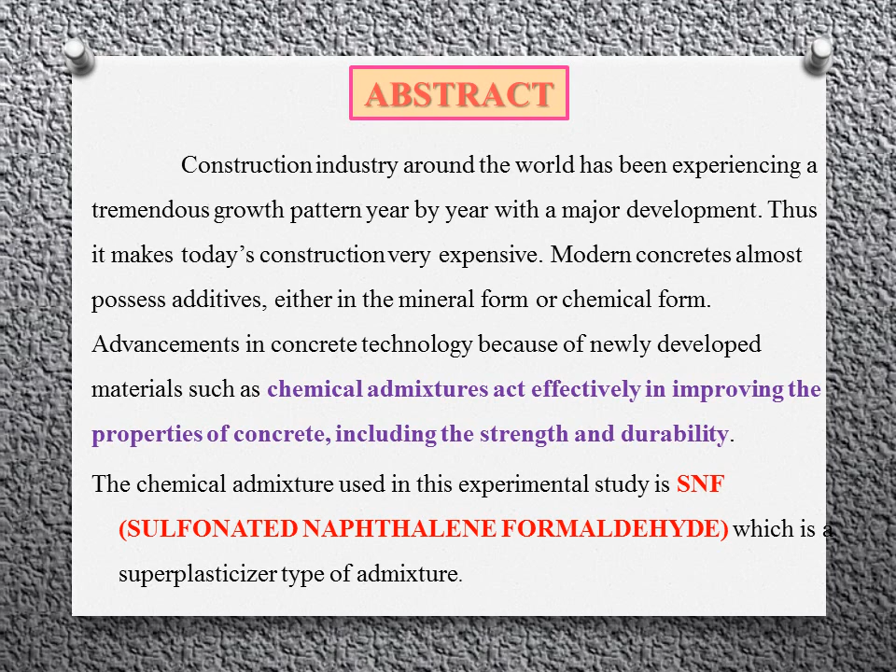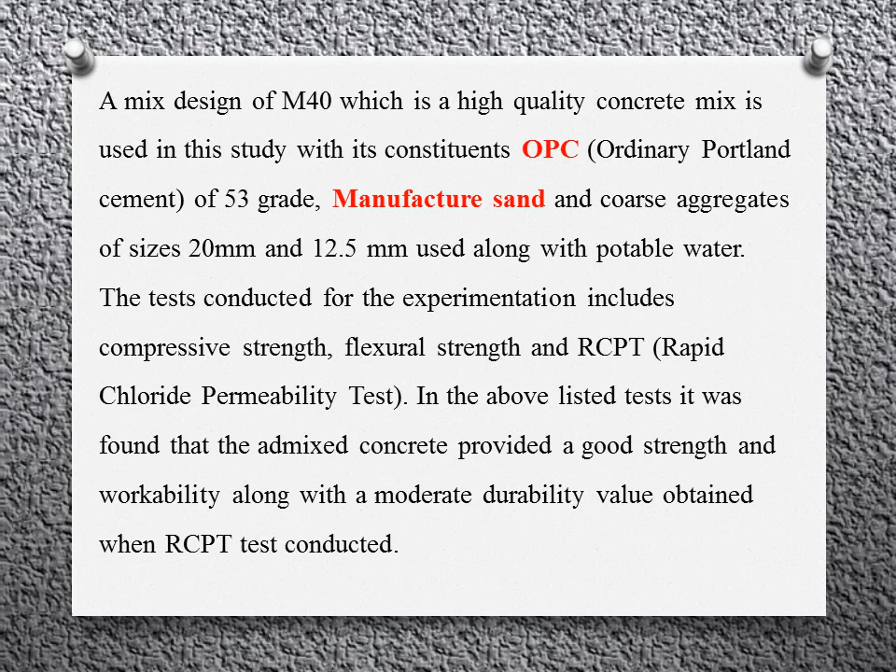M40 is the mix design in this study, along with OPC binder, manufactured sand and coarse aggregates of 20mm and 12.5mm. The strength test and the RCPT test were conducted.

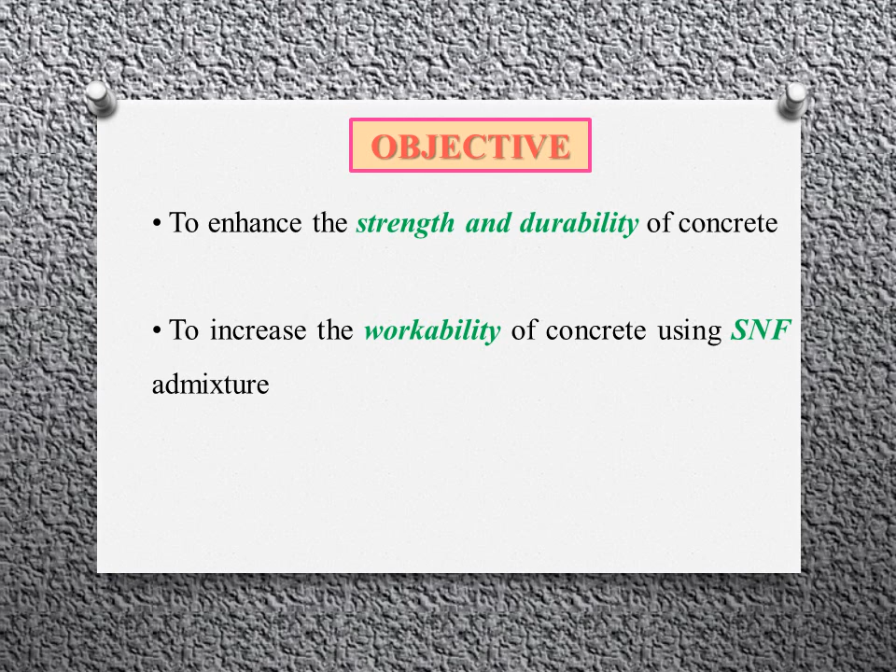The main objective of this study is to enhance the strength and durability of concrete, and also to enhance the workability of concrete.

The need for the study: admixtures of different types are commonly used nowadays to enhance various concrete properties. Thus, this study focuses on SNF, a superplasticizer type of chemical admixture, which is also a second generation type of admixture.

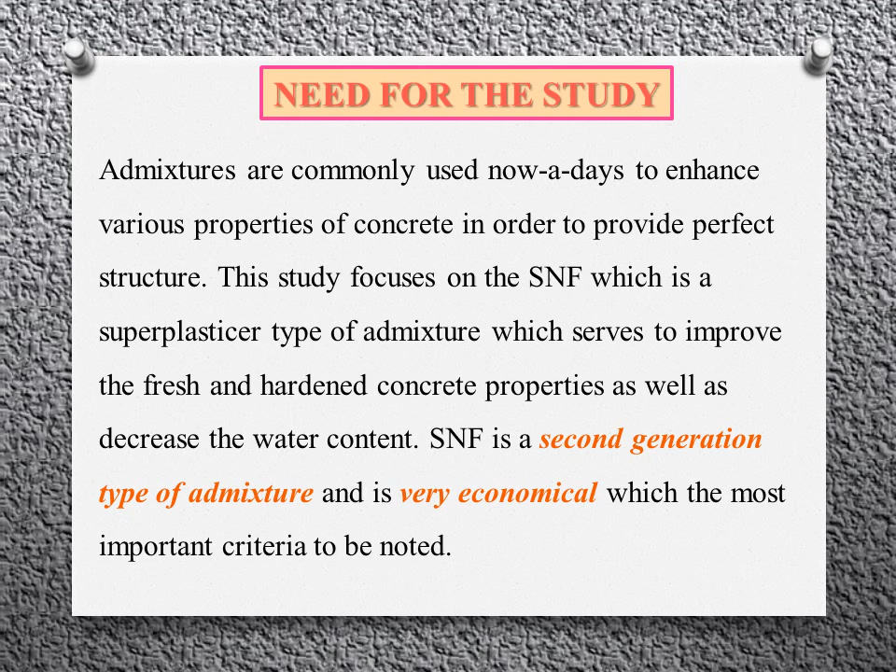It is very economical. This admixture serves to improve the fresh and hardened concrete properties.

SNF is highly pure and it makes the cement particles have high dispersency, low foaming, high range water reducing and obviously strengthening. It also improves cement workability and mobility.

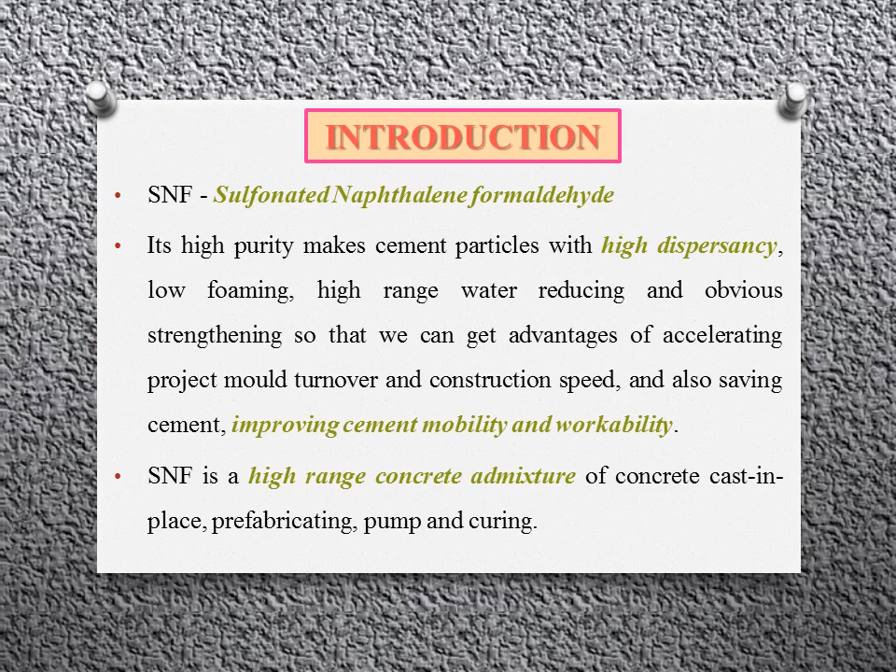The main advantages of SNF are it can adapt to various cements, as well as non-erodent and non-poisonous. It can be applied to highways, hydroelectric projects, ports, quays and skyscrapers, etc.

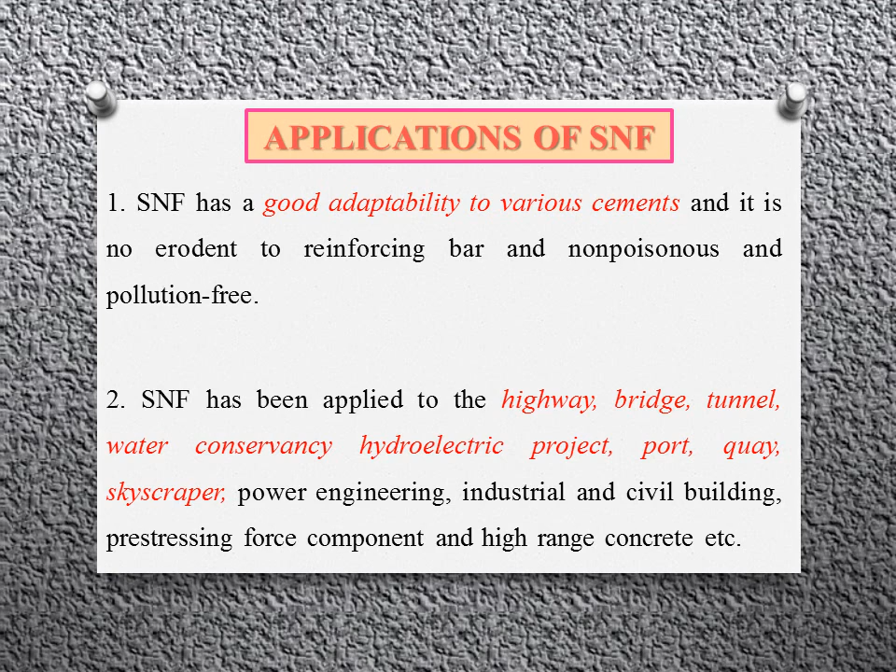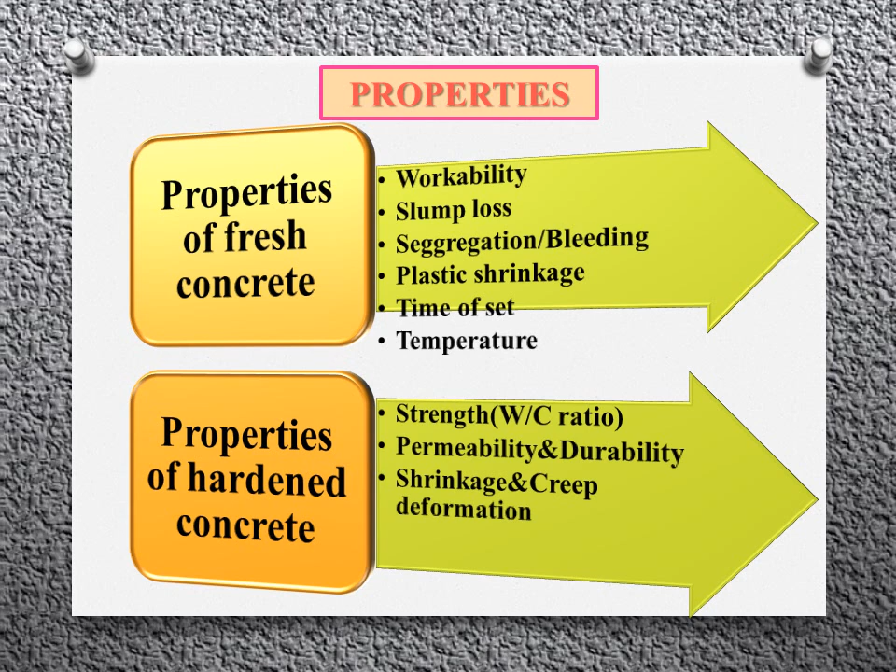The properties of the fresh and hardened concrete are as shown. Admixtures: types of admixture. The main classification of admixture is chemical and mineral admixtures.

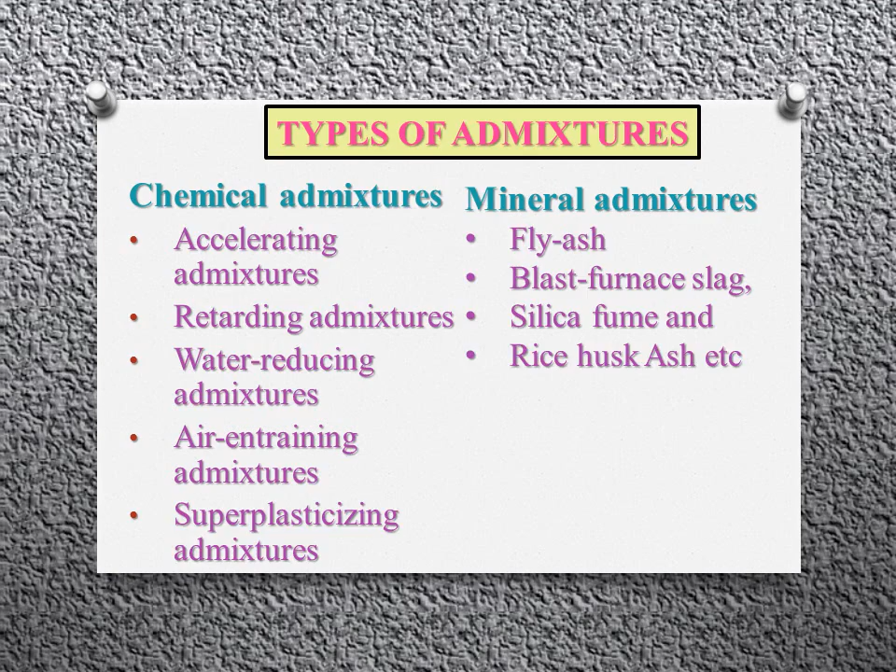Superplasticizers can greatly enhance concrete performance. It can give high strength, durability, low shrinkage and safer placement.

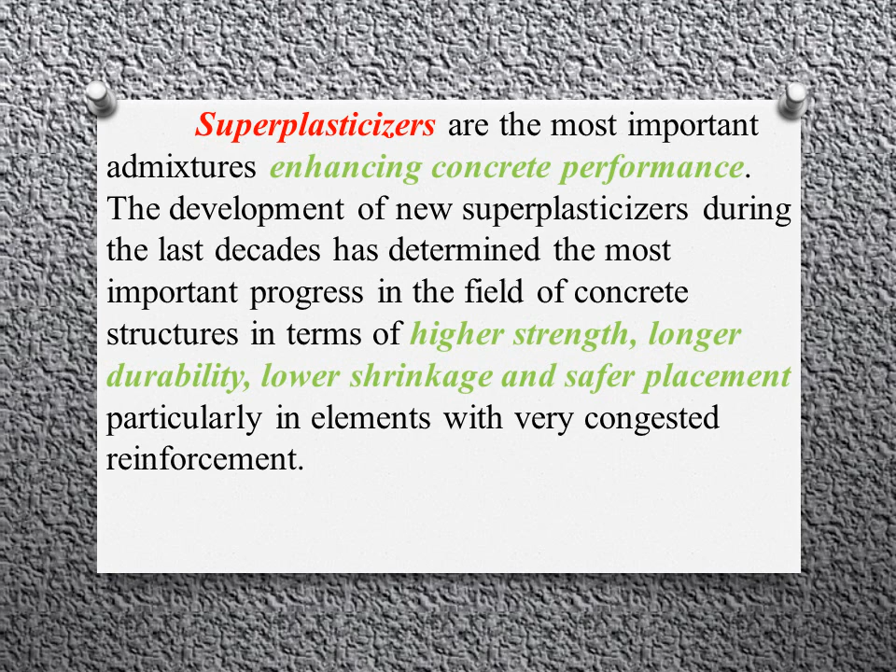The properties and nature of SNF is as shown. It's made using naphthalene, formaldehyde and sulfuric acid. It works well for concretes up to 60 megapascal.

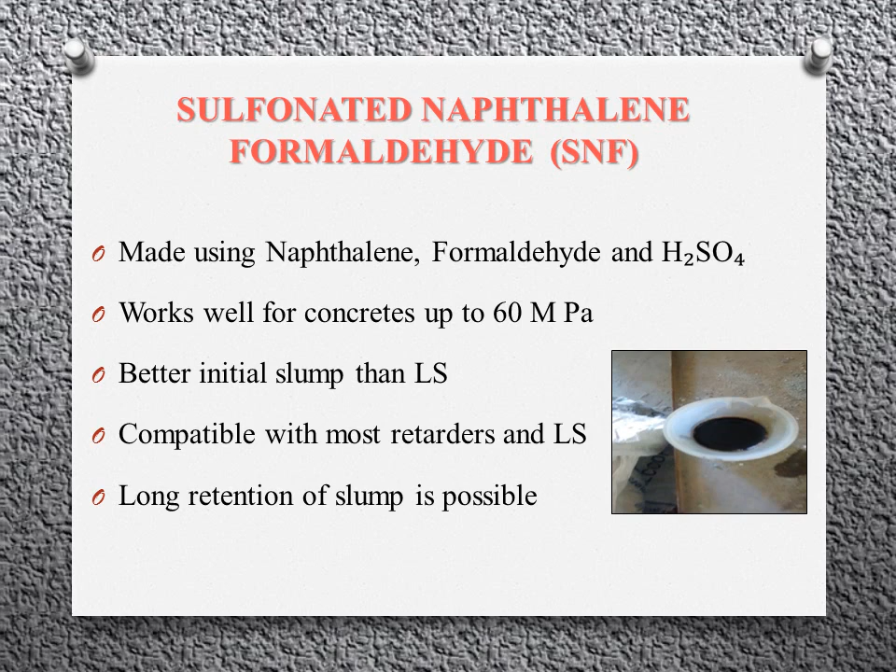It has better initial slump than lignosulfonates. Long retention of slump is possible.

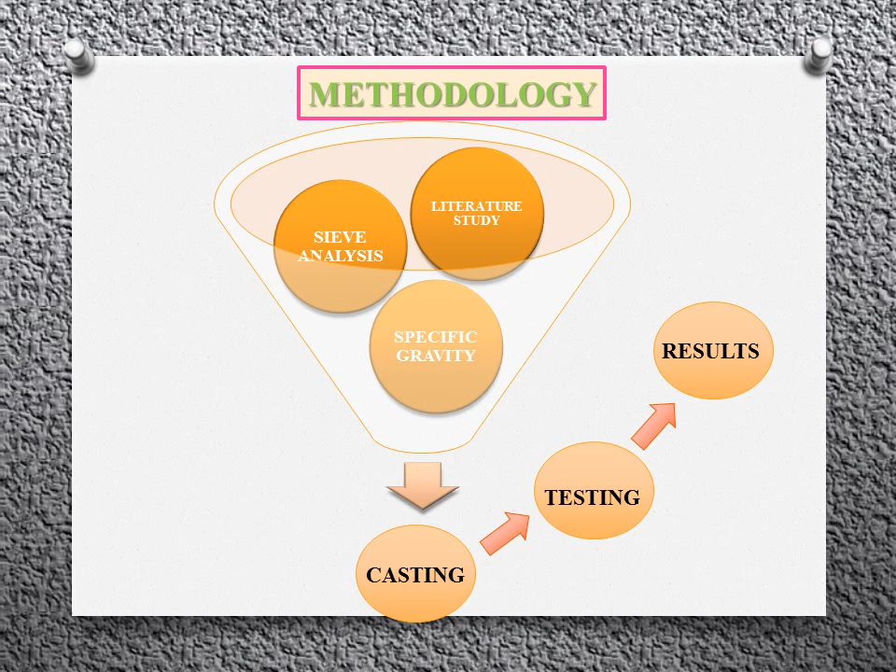The methodology followed for this experimental study is shown. The codal provisions used for this study are listed, which includes the IS codes and ASTM codes.

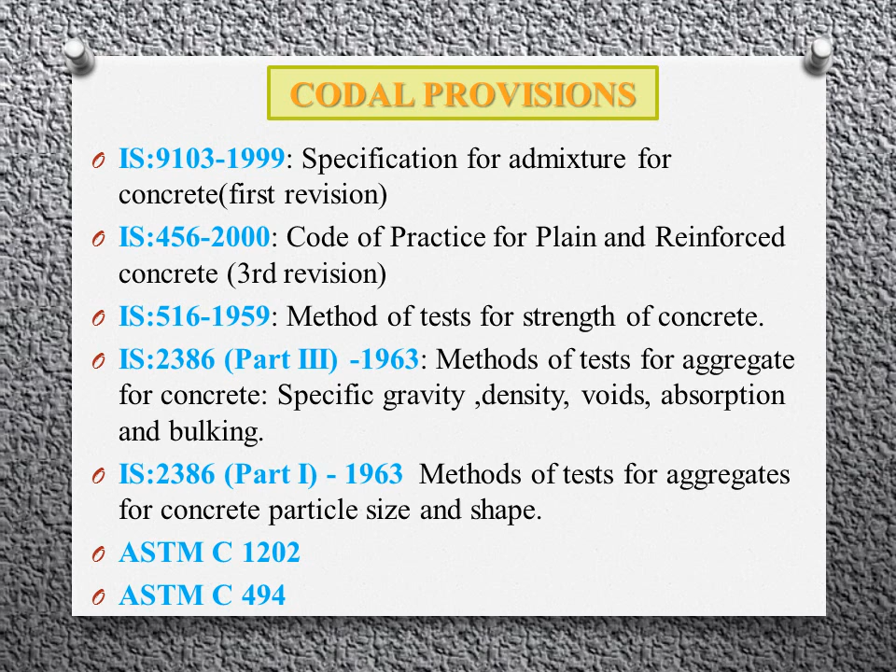Review of literature. These are the literature studies that were carried out, which includes the papers of various authors.

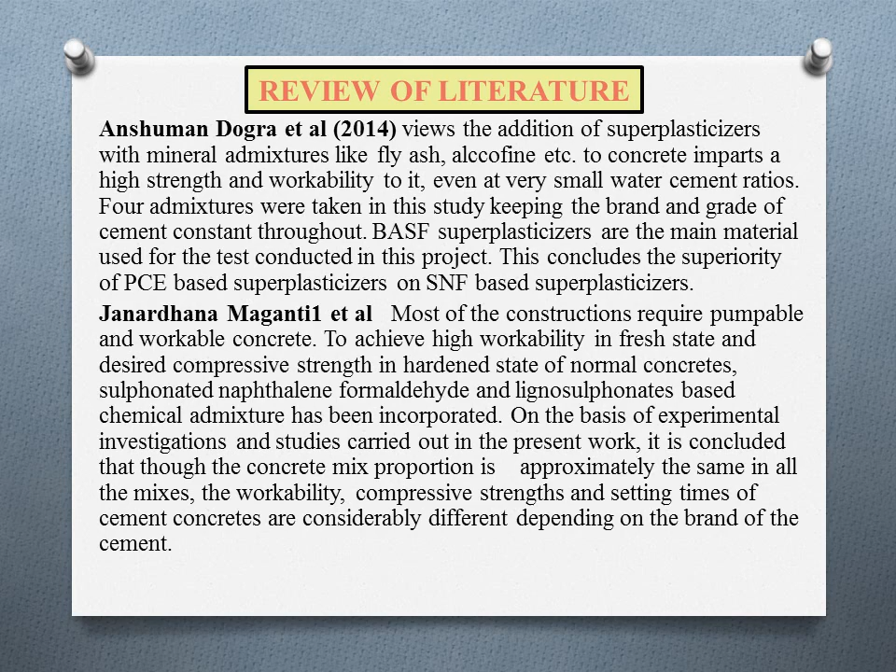The test methods conducted for fresh concrete are tests for workability, air content and bleeding, whereas for hardened concrete are tests for compressive strength and flexural strength, etc.

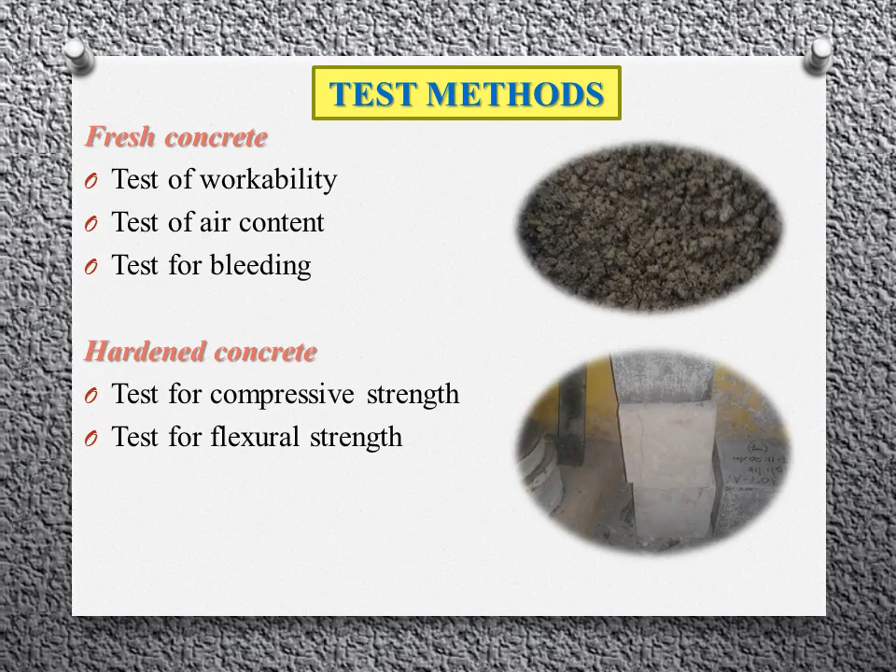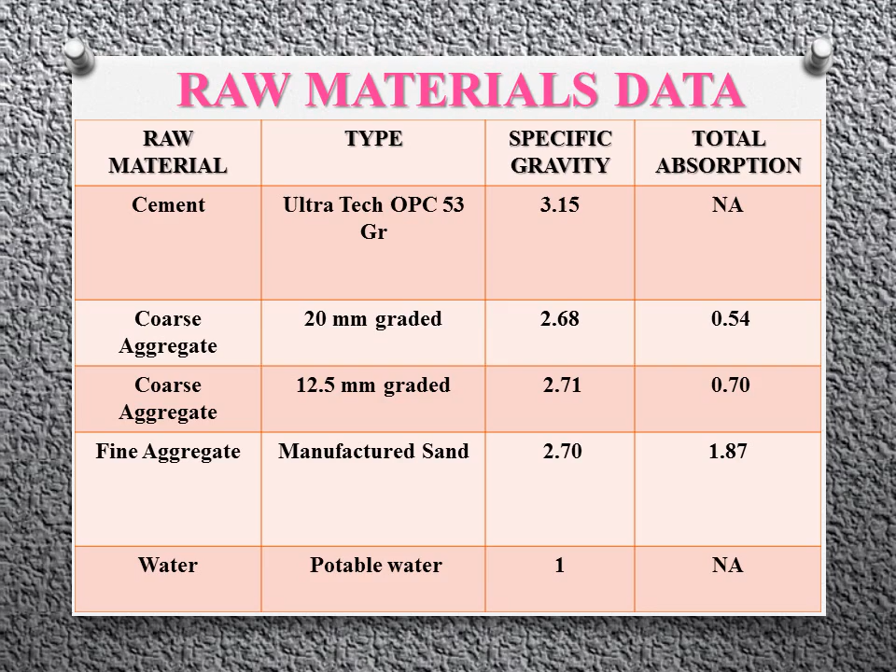The workability test was carried out to find the optimum dosage value for the SNF to be used. Thus, from the values, an optimum dosage of 0.8% of cement content, which gives a very high slump, that is very high workability, is chosen for this experimentation.

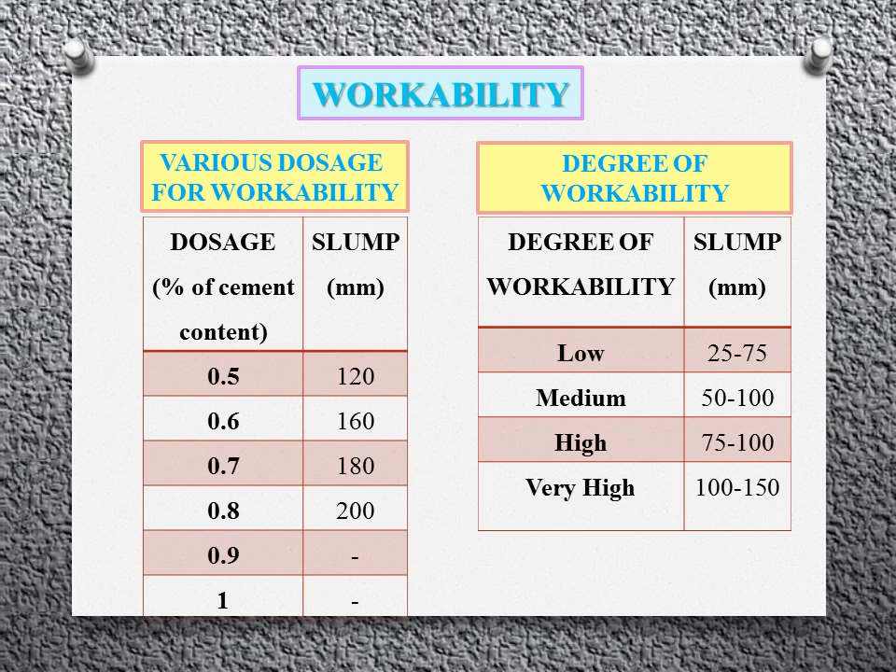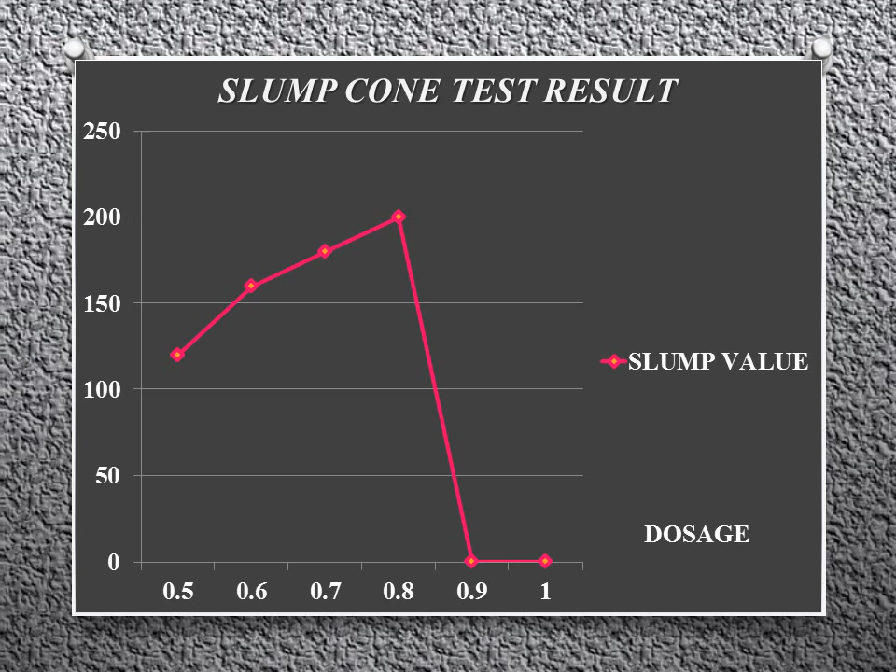Sieve analysis was carried out. The sieve analysis for aggregates of 20mm size and 12.5mm size is shown in the tabulation.

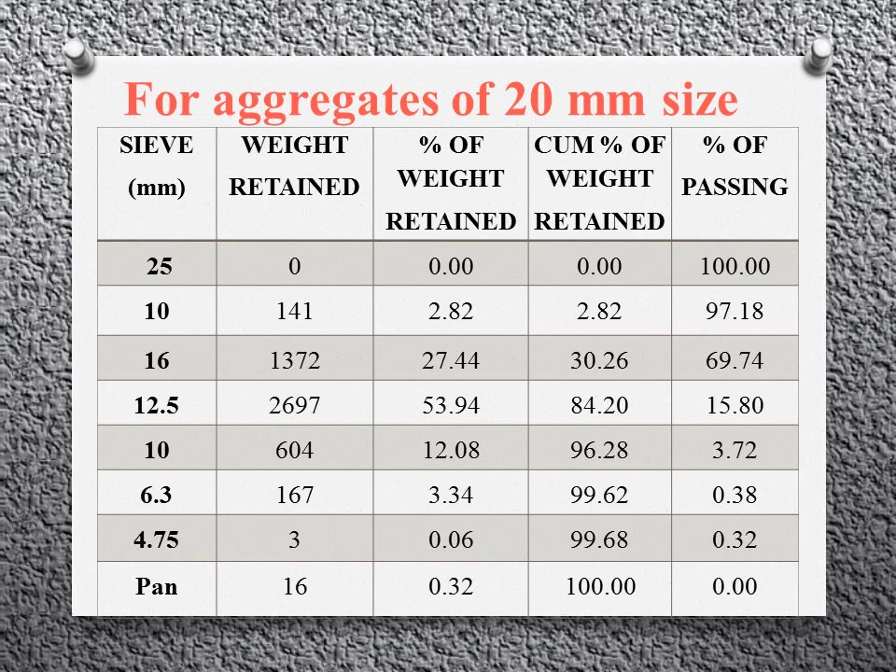The specific gravity test was carried out. The materials used and their specific gravity values are shown.

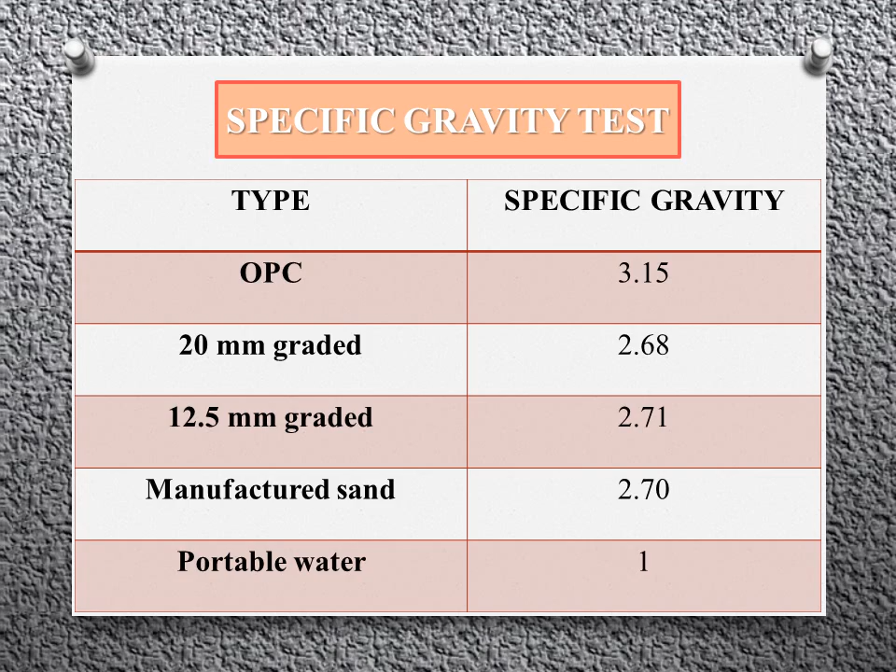The air content test was carried out to find out the air content in the concrete mix, for both the control mix and mix with admixture, and the values are shown.

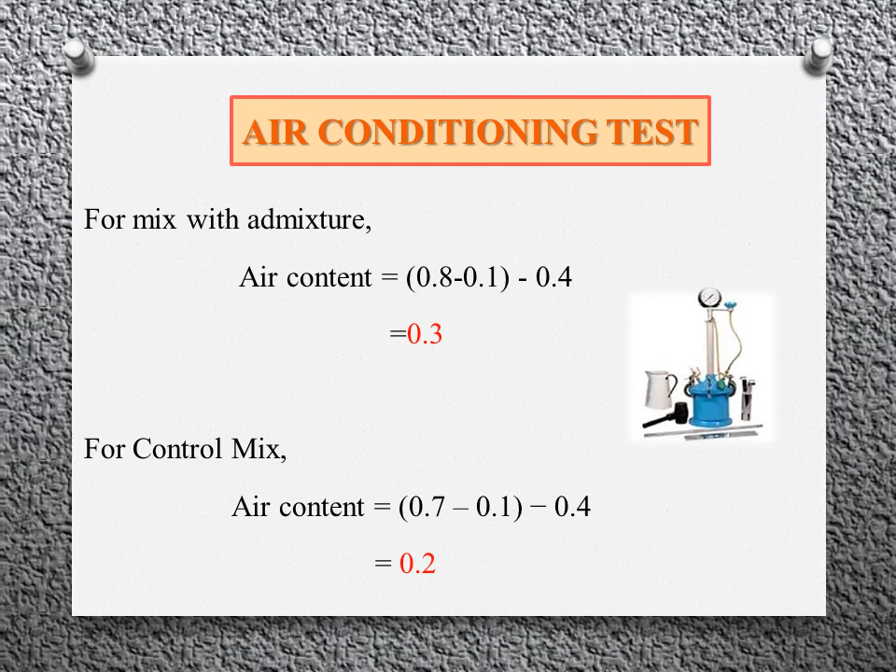The slump cone test, that is the workability test carried out for the control mix, is 110mm, and the value obtained for the mix with admixture is 200mm.

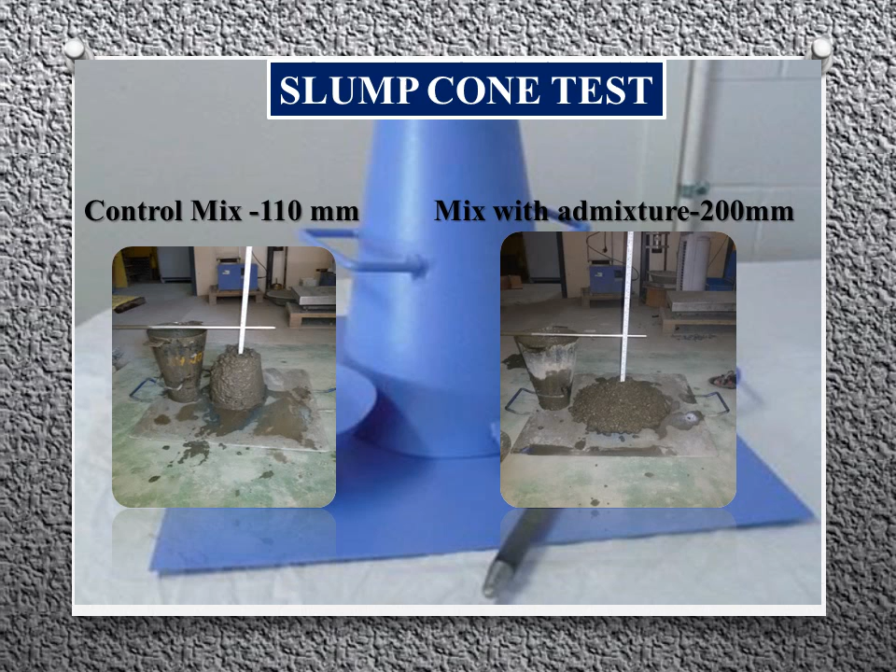Bleeding test, which gives a 2.1% value for the bleeding water.

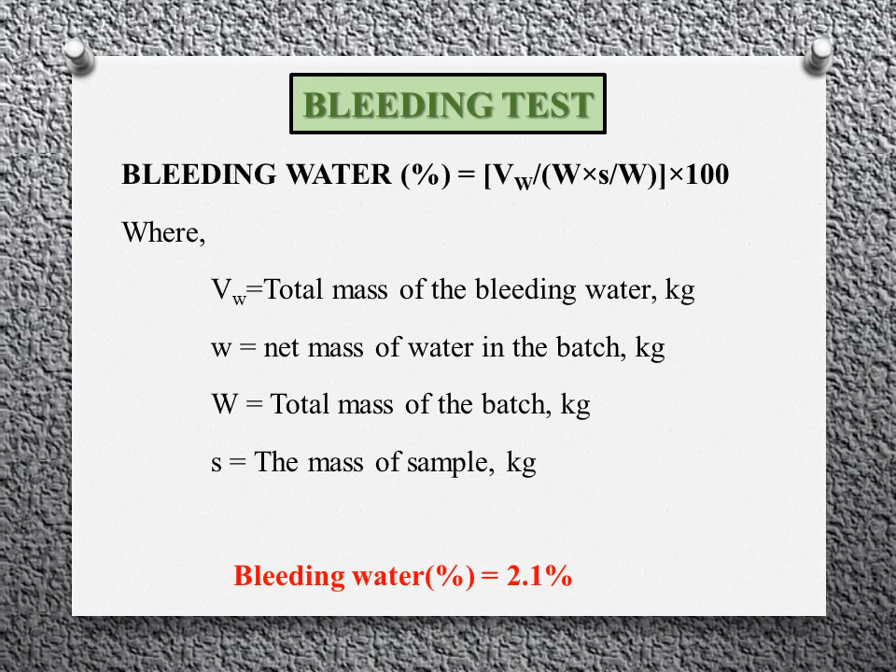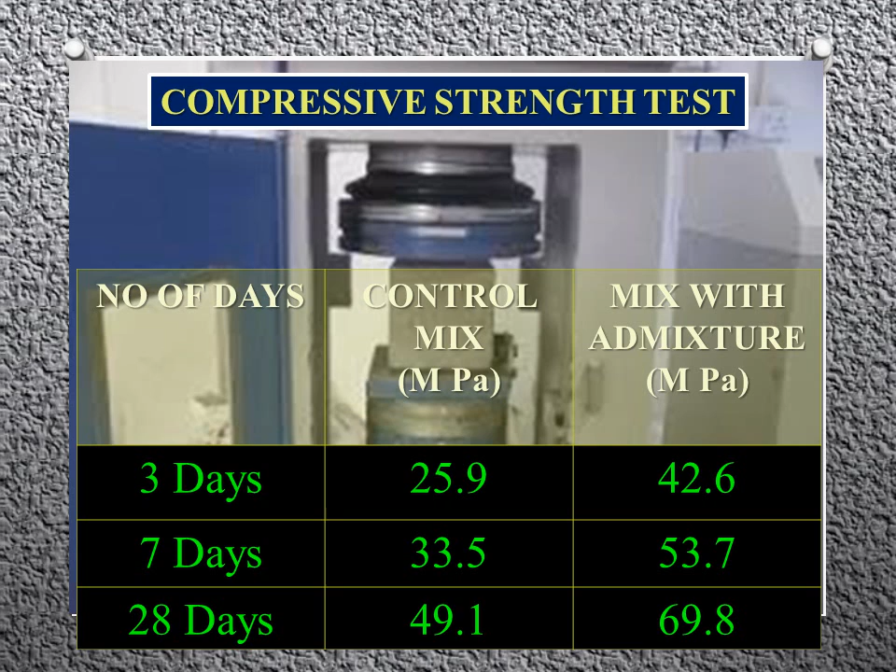The compressive strength test was carried out for various ages for both the control mix and the mix with admixture. From this tabulation, we can see the comparison, which shows that the mix with admixture shows a higher value.

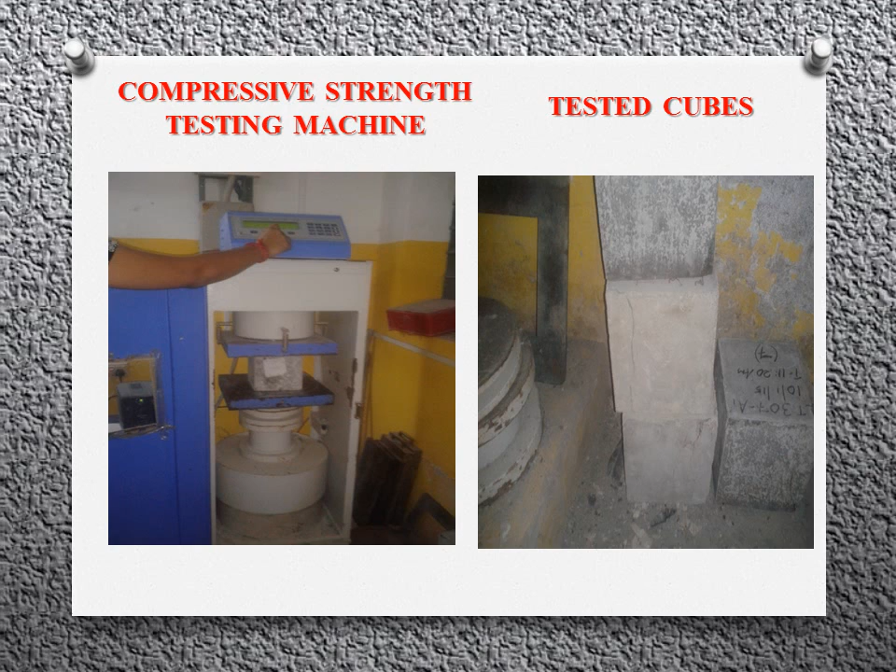Here we can compare the control mix and the mix with admixture. The admixtured mix gives a higher strength compared to the control mix, which is without admixture.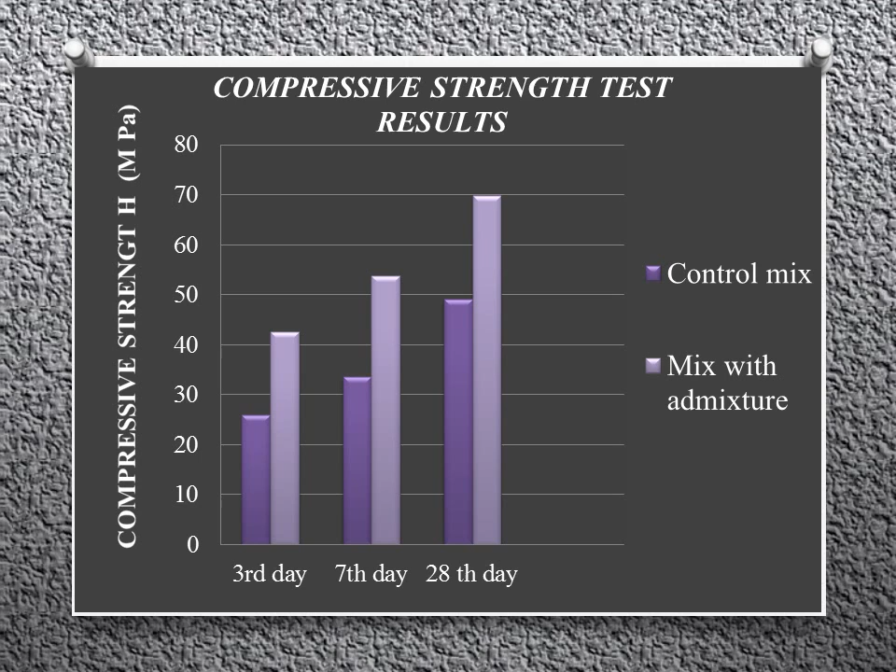Flexural strength test was carried out to find out the tensile strength at the age of 28th day for both the control mix and mix with admixture.

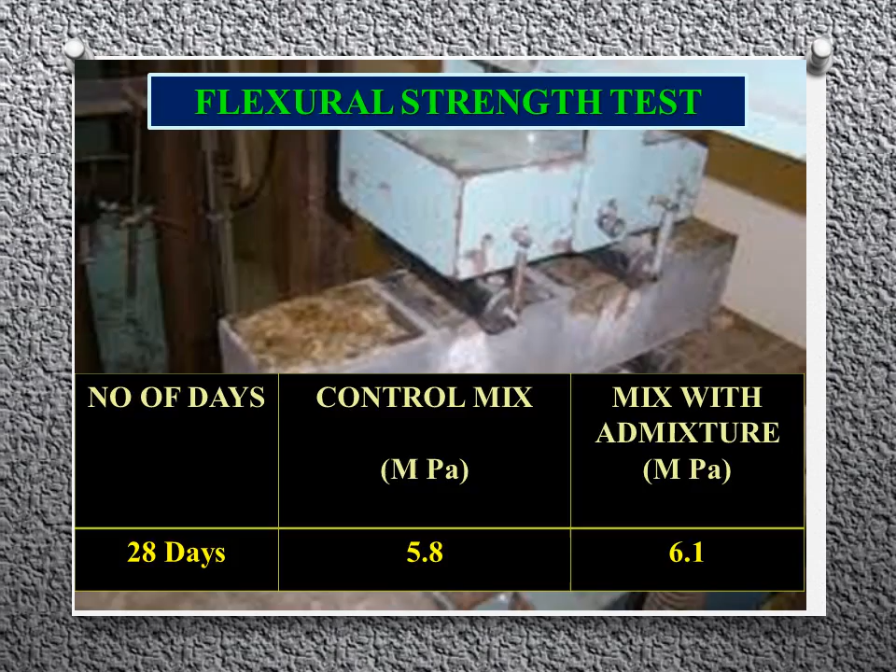The mix with admixture gives a higher value compared to the control mix. The pictures taken during the experimentation are shown.

The flexural strength test results are shown. The flexural strength value for the mix with admixture is higher compared to the control mix.

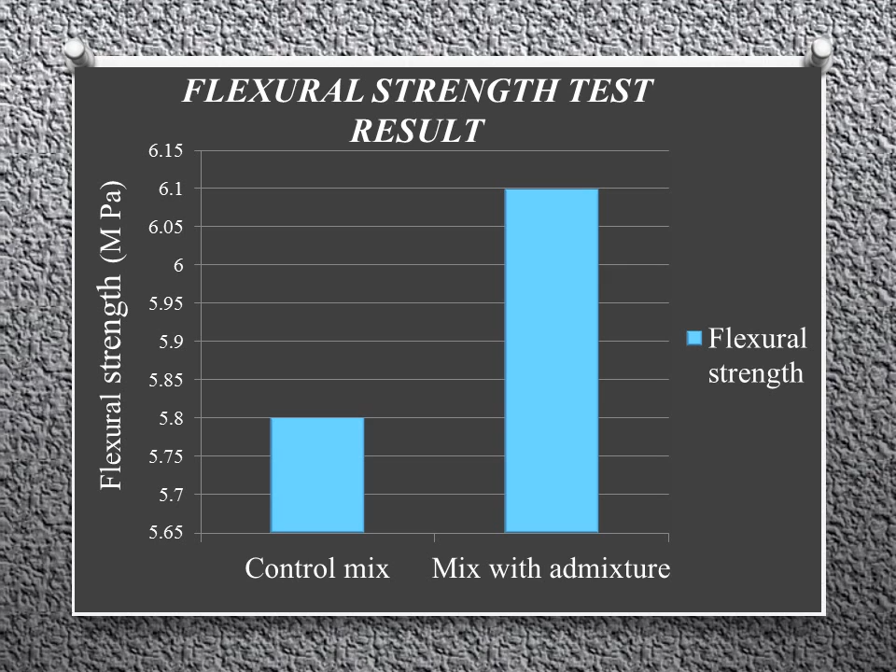The durability test carried out is the rapid chloride permeability test. It is the most suitable test for Chennai conditions. It shows the ages and the values obtained for the various ages.

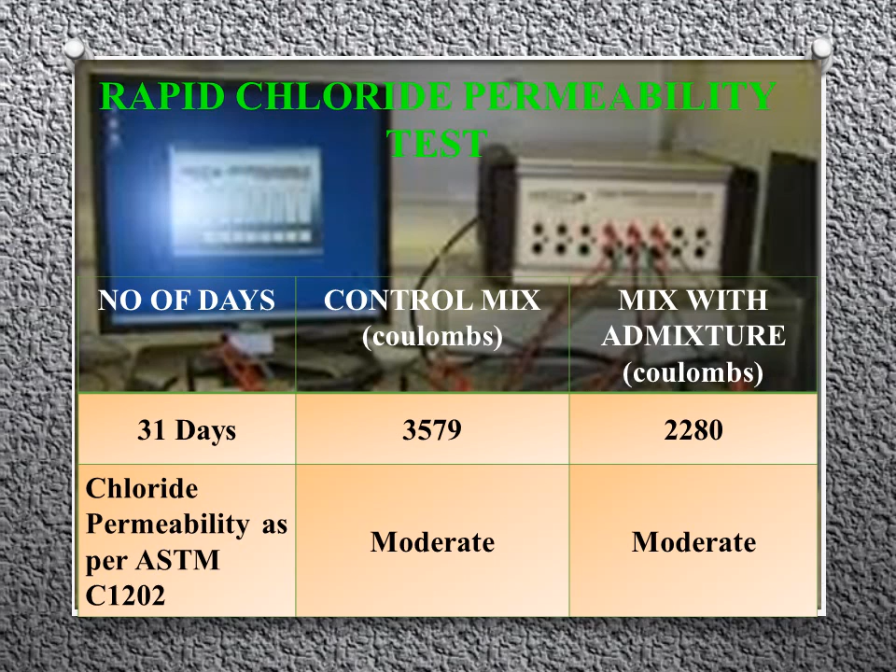Control mix and mix with admixture values at 31 days are shown. The pictures taken during the experimentation are also shown.

From the value obtained, our value falls between the range 2000 to 4000, which is moderate.

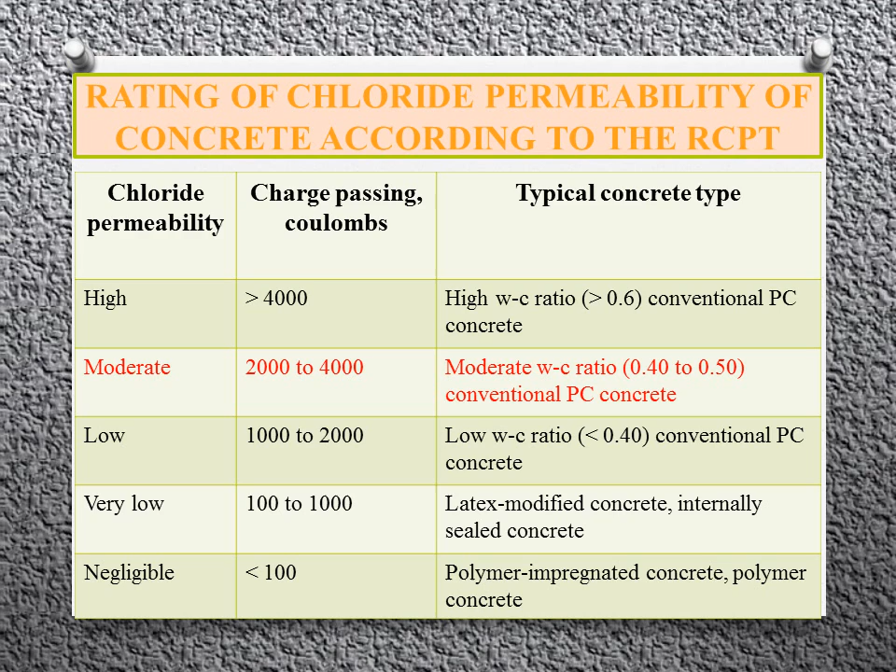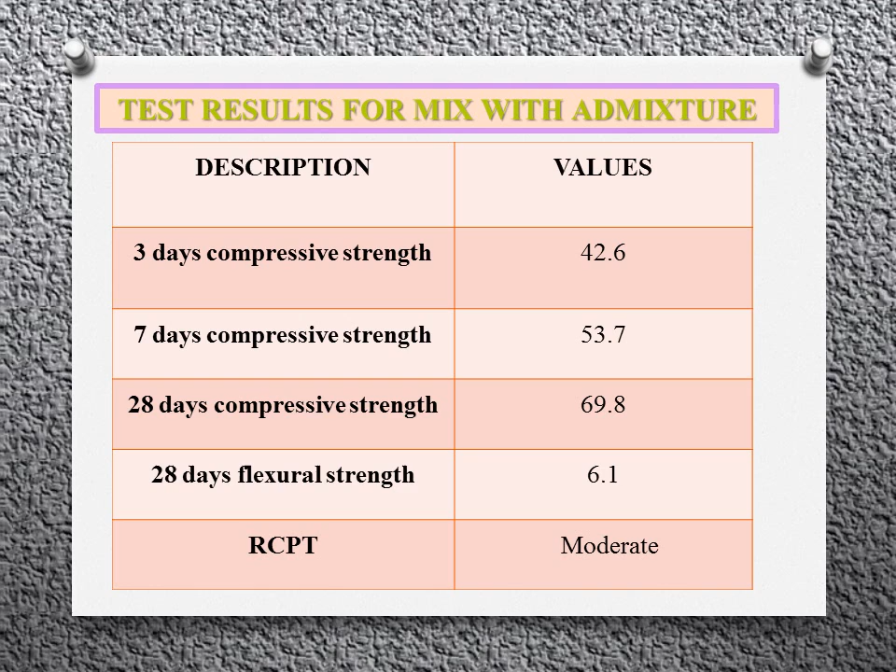Thus we conclude that superplasticizers are able to enhance the placing characteristics by increasing the workability at a given water cement ratio. Therefore, they allow easy placement of concrete mixes even with low water cement ratio as required for strength and durability reasons.

The main drawback is its slump loss. This can reduce or cancel the advantage of using superplasticizers, particularly in very hot weather.